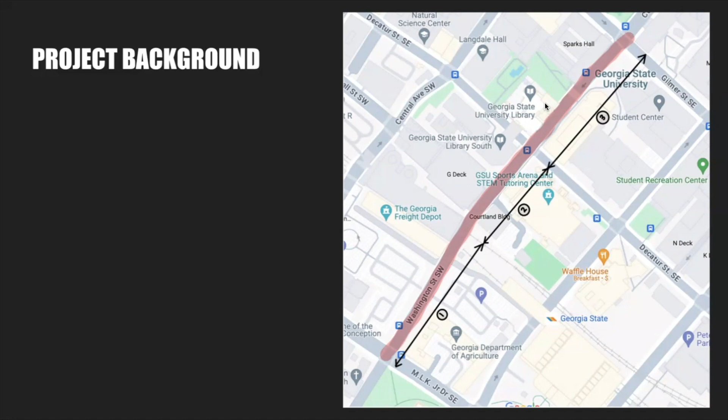A specific challenge within Section 2 is minimal clearance between the bridge and the surrounding buildings. Multiple buildings have only an inch of space between them and the bridge deck. For the design of the new bridge, we need to consider clearance over the MARTA and CSX rail lines, as well as the existing parking and lower streets.

The team also needed to match upper level access, such as parking structures and building doorways. Existing utilities also must be considered when designing the footing of the bridge. This area is highly traveled, therefore GDOT has placed a 180-day max closure for this area.

Some strategies and solutions that we have are conventional construction, high early strength concrete, pre-stressed concrete girders, steel end diaphragms, and micro piles that allow you to shrink the size of the footing cap. We also are proposing a phased construction package, which allows you to start on the beginning phases of construction.

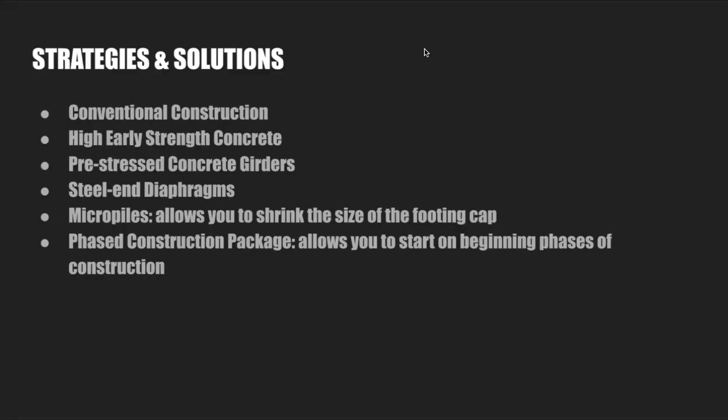Here I'll be talking about the bent and footing placement from the plots that we were given. So this plot here shows section 1 and part of section 2, and the next slide will show section 2 and section 3. So this case study required a lot of thought-provoking questions of how to create new bents for the beams. After discussions, the team had decided to try and equally place the bents while avoiding major spacing between utilities, existing piles, and the MARTA CSX railroad tracks.

So in the first section between MLK Junior Drive and the end of the first turn, our suggestion requires a bent to be placed there on the south side of the three existing columns. You can see that is bent 1 over here by the parking lot. It'll be parallel in nature and will be very close to the columns due to that existing driveway that's on top of the bridge for that parking lot.

The next bent will be placed around the existing brick building. Bent 2 can be shown here. And the only intrusion that will be affected in this area will be the concrete ramp for the Georgia Freight Depot while that's under construction. But it shouldn't be closed for too long, so we think that this is okay.

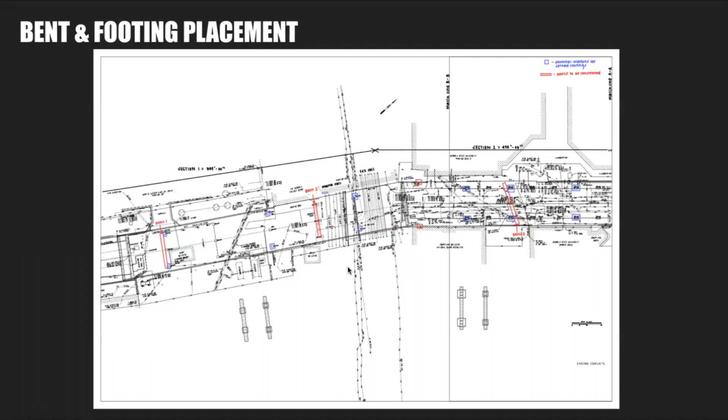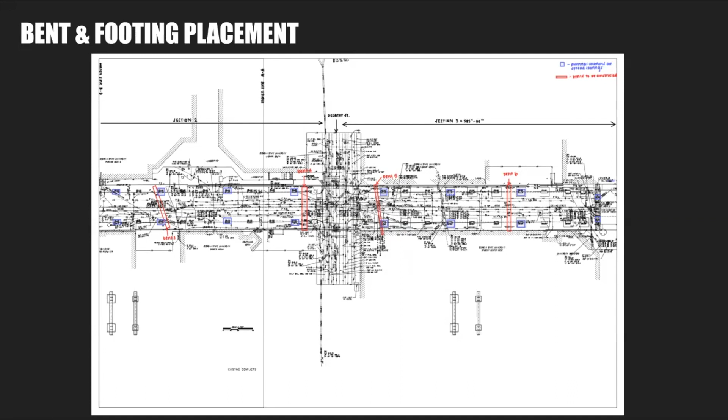So the new locations for footings are shown in this blue color on section 1, section 2, and section 3 here. And so each of these are spread footings, and those spread footings are placed under every other existing column currently. So this allows us to place the footing somewhat evenly and avoid any of those existing underground utilities.

All right, so this ended up being the girder section that was chosen. As you can see, we chose a bulb tee that was 72 inches. Using the chart from lecture 3 is how we determined that we were going to use that 72-inch bulb tee. This is the best girder size for this project. We'll be using 150-foot spans for all the sections to keep all the spans the same length, and we'll maintain the same beam spacing for all of the spans, which will be 6-foot spacing.

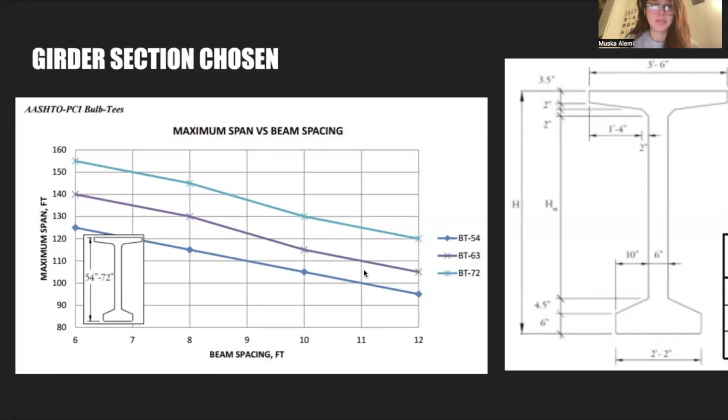This is section 1. And this is a sketch of the elevation view of section 1 from MLK Drive to the railroad tracks. As you can see, this section is our longest section because it spans about 600 feet. Like I said, we're keeping that 150-foot span, and we have 7 columns spaced out at about 90 feet apart with 30 feet of overhang on either side.

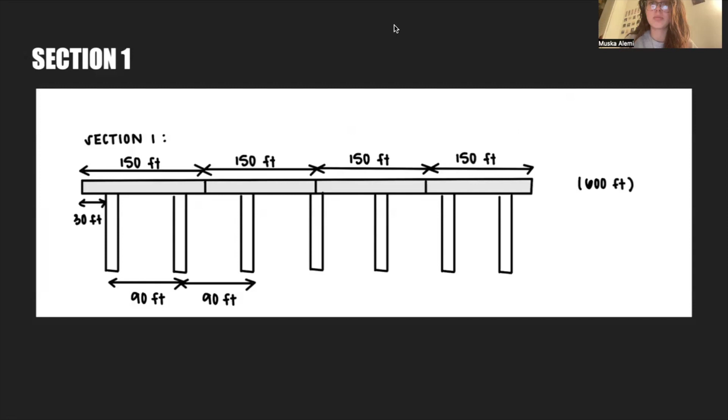So for section 2, this is a sketch of the elevation view of section 2 from the railroad tracks to Decatur Street. The section is approximately 450 feet. There will be 3 bulb T72s, 150-foot spans, 5 columns, spaced at 80 feet with a 25-foot overhang on either side.